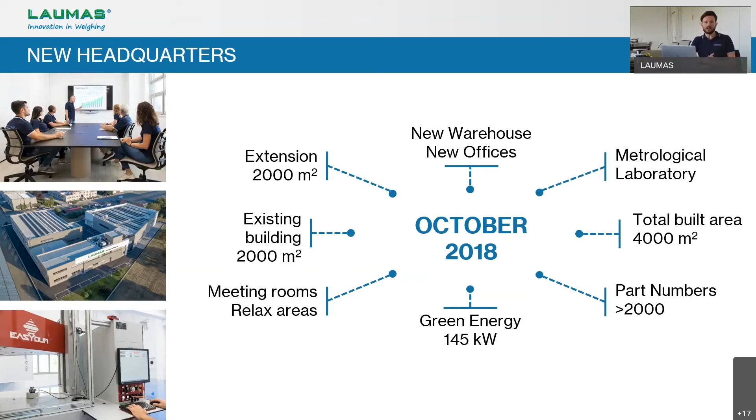Now the covered area is about 4,000 square meters, of which half for warehouse, which hosts more than 2,000 different codes of products, finished and semi-finished products, and also with the new photovoltaic installation that produces 145 kilowatts of green energy that is installed on the top of the roof.

Talking about the metrological laboratory, LAUMAS will be soon able to offer a calibration service for load cells and issue a certificate according to UNI EN 17025, as standards ISO 376 and ASTM E74, or to issue a calibration report ISO 9001. Our metrological laboratory is also completing the accreditation process by Accredia.

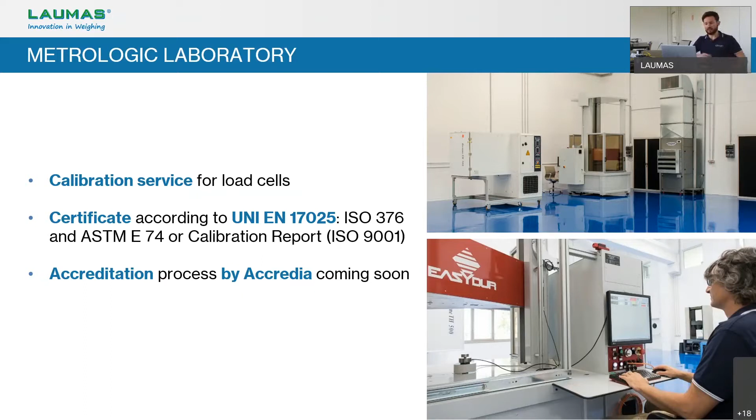One of our distinctive strong points has always been being able to dispatch orders of standard products in a very short time. We say maximum 5 working days, and face also possible peaks in sales of specific codes. And this is thanks to the volume of our warehouse, which is above 4 million euros and includes more than 600,000 units, always ready at stock.

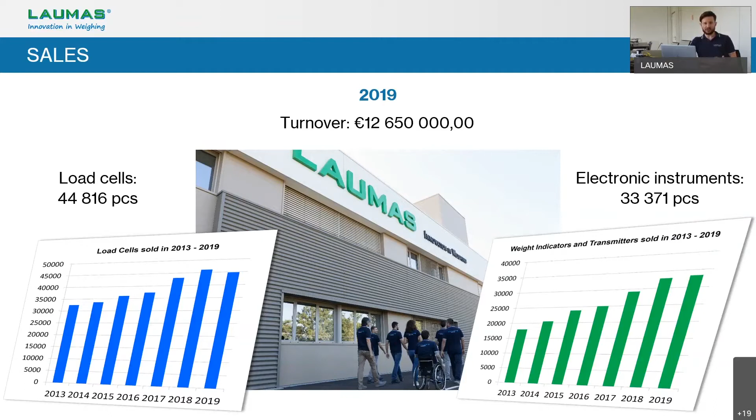And so, as we mentioned the sales, in order to provide some data about sales, this slide shows you how sales of load cells and electronic instruments, that are the 2 main families of our products, increased since 2013. During these last 7 years, load cells production increased about 40% and electronics production almost doubled. This means that in 2019, last year, LAUMAS sold almost 45,000 load cells and about 34,000 units of electronics, considering transmitters and indicators.

The other main difference between our past and our present is that even if during the first 20 years of activity LAUMAS mainly addressed domestic sales, now LAUMAS has been focusing more and more on international trading. So as the result, the export process is in constant expansion worldwide, and sales to foreign markets are growing steadily. As you can see from these numbers, exports have increased from 18% to 36% from 2011 to last year, and they are still increasing this year also.

Moreover, also sales within the Italian market are in continuous growth. So nowadays the average domestic sales are about 64%, but we need also to be careful because this data contains many instruments that are sold in a second moment abroad. So not all the units that we sell in Italy remain in Italy. A lot of them go abroad in a second moment, and so the total amount of real exports is actually much higher than what we can see in this slide.

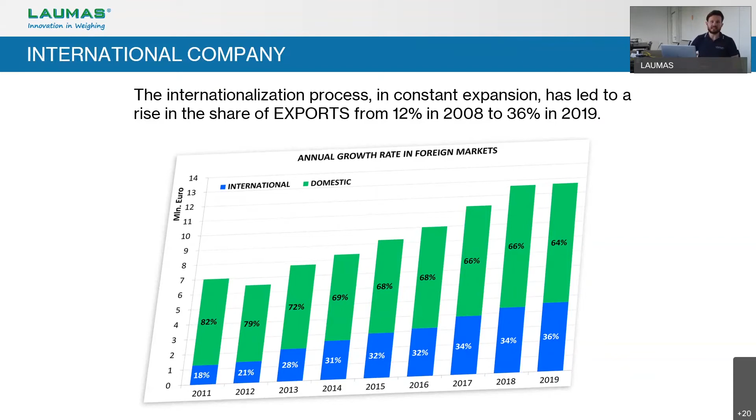So we believe that this steady growth has been made possible thanks to some strong points, some points that we believe to be our strengths. Firstly, the constant research and development based on continuous updating and innovation of our already existing products and new products.

An excellent quality-price ratio, thanks to 100% of units being tested before shipment and calibration service also available. But also, naturally, pre- and post-sales support and technical assistance and repair service that we supply to our customers. And finally, a wide range of items, as we have already mentioned, ready in stock to be shipped.

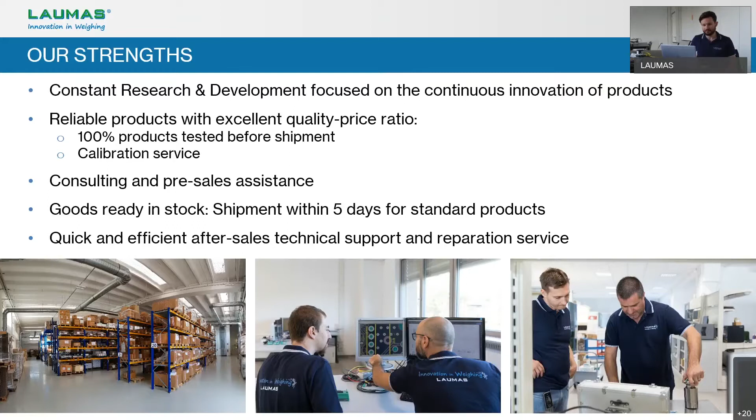To better represent the company brand, the slogan "Innovation in Weighing," which you may have seen by visiting us or at the occasional exhibitions or watching our videos, was created to emphasize the product innovation aspect by LAUMAS.

As previously mentioned, in 2007, our R&D department became fully operative and equipped with a laboratory allowing us to test electronic and mechanical components to ensure innovation and quality of the products. These tests include electromagnetic compatibility, electrical safety, immunity tests, emission tests. And they are all very important for us. All of these tests can ensure our products are not subject to external interferences or do not generate interferences on their own, but also ensure the safety of the workers using our equipment.

The other important laboratory that we also mentioned already is the metrological one. What we haven't said is that we have testing machines allowing us to test up to 10 tons with a climatic chamber and up to 50 tons in other cases. In case of tests for higher capacities, we rely on external laboratories.

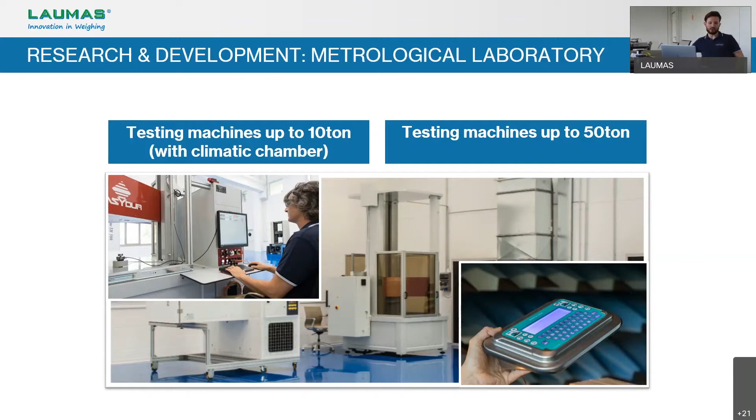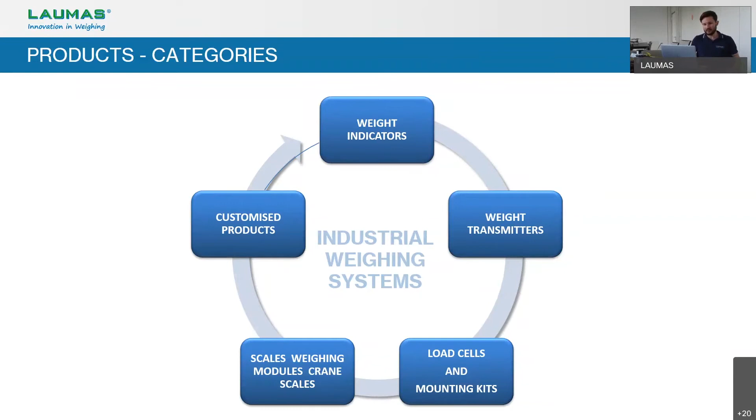We can therefore offer a complete service to our customers, which reflects into several categories of products, such as weight indicators, weight transmitters, load cells and mounting kits, scales, weighing modules, crane scales, and obviously customized products that are also very important. Now, let's see these categories one by one. As I said at the beginning, it will be a quick view of each category.

So let's start with the indicators. Our indicators are grouped in a series called W, and they are suitable for any industrial process that requires simple or complex weighing systems such as weight monitoring, dosing systems, batching systems, single or multi-component, filling, unloading systems, and so on. So you can see some examples of installations where our indicators can be used, and also the different mounting solutions and other characteristics.

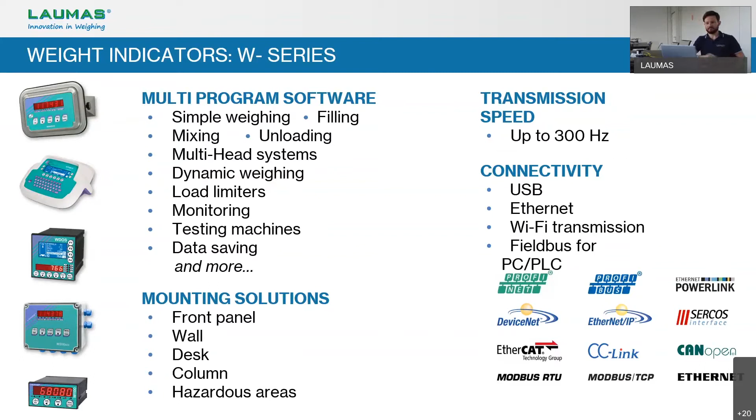Among the different models, the W100 and the WLIGHT are the easiest and simplest ones, which can be mounted in front panel or in other ways, especially the WLIGHT, and have different outputs and also serial ports.

They can be provided with different certifications and approvals, such as OIML for the European market, UL recognized components for the US and Canada, EAC certification of conformity for the Eurasian Customs Union, NTEP for commercial weighing and measuring in the US, PAC for legal for trade instruments within Russia, and NMI trade approved for Australia and New Zealand. These last two approvals, the PAC and NMI in this case, are available only for the W100.

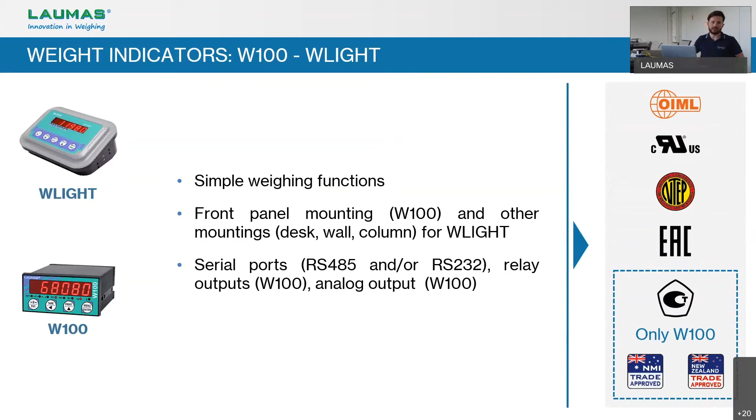The several models and versions of LAUMAS W indicators can easily adapt to an application, environment or needs, as we have seen. Specific versions with LCD or LED displays, basic or graphic displays, weighbridge versions, batching programs, plastic or stainless steel enclosures, several mounting ways, and a wide range of fieldbuses are available. We think that all of these features make our indicators extremely competitive and interesting.

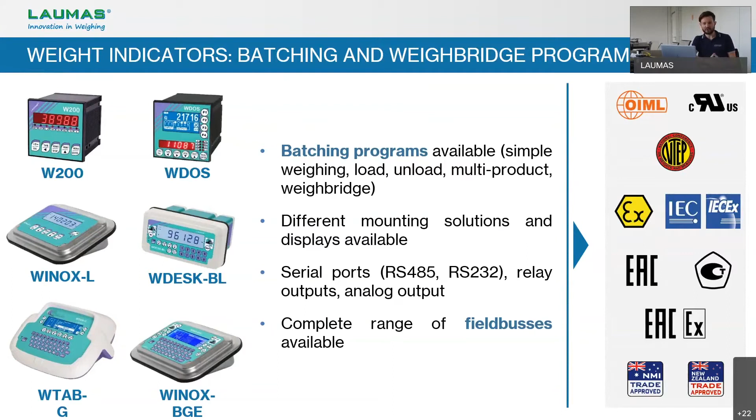As with the W100 and WLIGHT, the other members of the W family can also be provided with different certifications and approvals. Again, OIML, UL, NTEP, NMI, EAC, PAC, and they can also come, depending on the version, with ATEX, IECEx, and EAC Ex certifications, which are the worldwide certifications for installation in hazardous areas.

Let's now talk about the second category of products, which are the weight transmitters, whose function is to connect and transfer the signal from a load cell to the electronic instrument, which can be a PC, a PLC or an indicator. All of our transmitters have a display for reading, a keypad for easy calibration, and most of them can come with almost all field buses existing on the market to communicate with PCs and mostly with PLCs.

Our transmitters can be single channel or multi-channel. The second group refers to several additional functions that I'm going to describe later. Last but not least, the LCB is not properly a transmitter, but a signal digitizer, and we will also analyze it later.

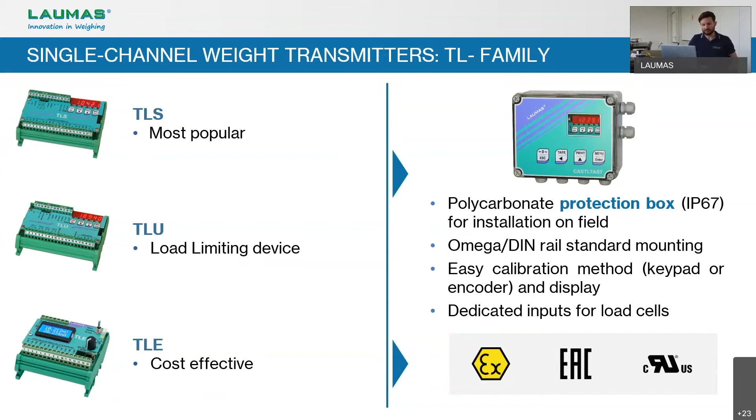As we previously said, the LCB can be assimilated to transmitters despite being actually a digitizer. It has its own specific features that make it different from the proper transmitters. For example, the availability of several field buses, more than the other transmitters, including, for example, IO-Link, and the possibility to install it integral to the load cell's body, directly connected to the body of the load cell, making it ideal for IoT and Industry 4.0 applications.

Also, it has a stainless steel AISI 316 enclosure that guarantees an IP67 protection degree and makes it possible to install the LCB anywhere the load cell is installed, where the load cell is working. The LCB is clearly conceived to work with a single load cell, but it's not limited to that. The status-LED communication interface also allows you to immediately obtain info about the state of communication.

And very important, LCB comes with its own software, the LCB Manager, allowing remote configuration, managing data backup and restore, and obviously firmware updating. On our YouTube channel, it's possible to watch a dedicated video explaining in detail LCB's features and also a technical tutorial about how to wire the LCB to a load cell. This is one of our products that makes our range and our offer so different from our competitors', and also the only instrument in the LAUMAS family available today with IO-Link protocol.

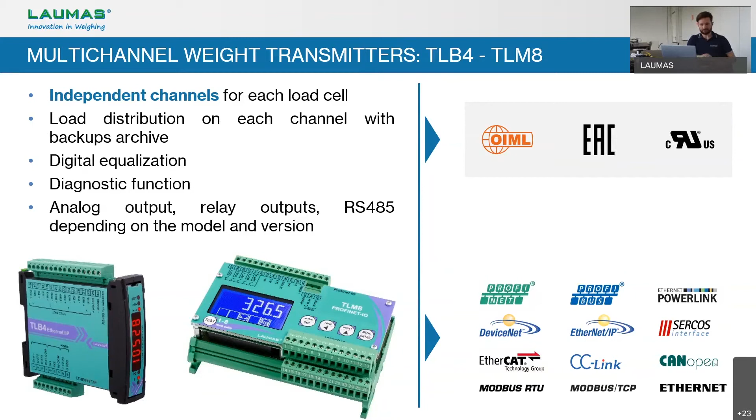Also, you can carry out digital equalization, making equalization much easier and faster than the traditional one. The main difference between TLB4 and TLM8 is that TLB4, as the name says, can work with maximum 4 channels. It's conceived to be installed on rail mounting or panel mounting, and is NMI trade approved, while TLM8 can work with maximum 8 channels, and it's ideal for rail mounting also, but it can also come with an IP67 protection box, making it suitable for installation on field.

The third member of the multi-channel transmitters is the CLM8, which is also called Intelligent Junction Box. It is approved for OIML, EAC, UL, and it will transfer the multi-channel functions that we have already seen to an indicator of the W series, except for the graphic ones. It manages up to 8 channels, and has only Ethernet TCP/IP as optional field bus, as typically it's connected to an indicator or a PC more than to a PLC, and you can order it with several types of protection boxes or also as a naked board.

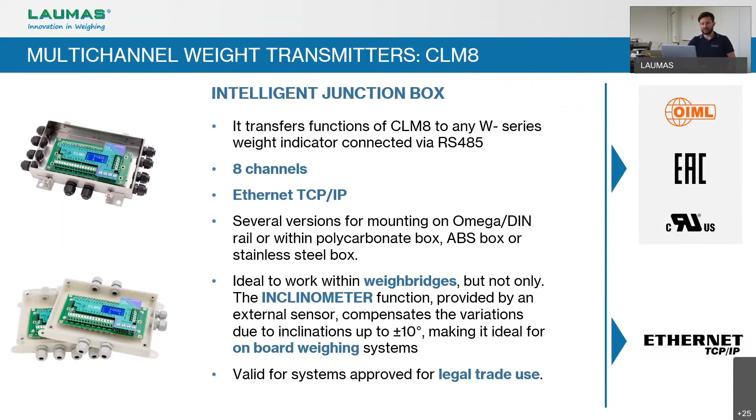Its main application is weighbridges, but not limited to. For example, the optional inclinometer function provided by an external sensor makes it ideal also for onboard weighing. This application is also valid for legal-for-trade systems and corrects possible variations of the signal due to inclination up to plus or minus 10 degrees. Notably, the inclinometer is now available also for the other multi-channel transmitters.

Finally, LAUMAS has a wide range of load cells that can satisfy any kind of application in weighing and force measurement. Depending on the model and capacity, load cells can come with OIML class from C2 to C5, NTEP certification, PAC standard, and all the approvals for installation in hazardous zones, so ATEX, IECEx, EAC Ex.

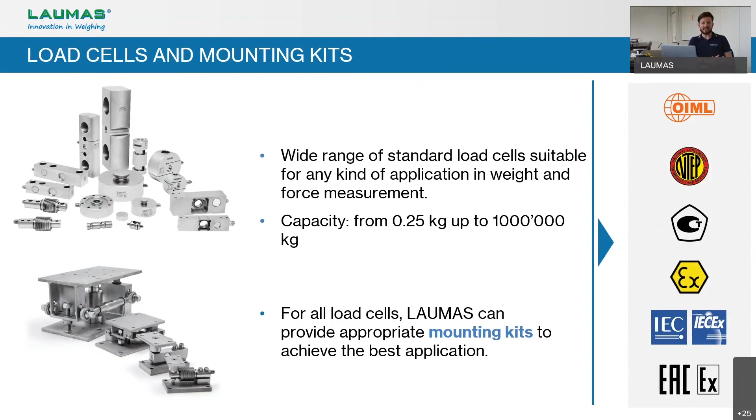The first group of load cells are the single point or off-center, whose capacity is usually low and conceived to work in single load cell systems. Each model and capacity can correctly work if the weight is applied within a platform area that is specified in its datasheet. It means that, for example, if you have a single point load cell that bears a plate that is indicated in the datasheet as 400 by 400 millimeters, we can use it for a platform having smaller or equal dimensions, but not larger.

Applications other than platforms are also roller conveyors, small tanks and hoppers, filling, bagging and packaging machines, and dynamic weighing.

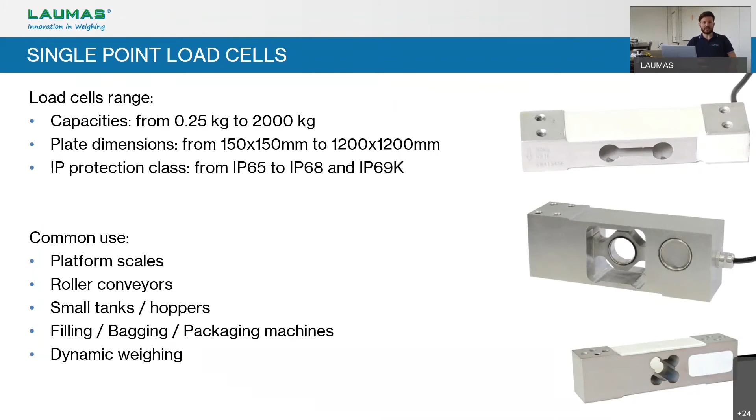The second group of load cells is made by the bending beam and shear beam ones. Their capacity range is low-medium, and they are used in groups of 3, 4 or more to weigh silos, hoppers, mixers, roller conveyors, big bag loaders or dischargers. They can be matched with 3 different kinds of mounting kits, which generally compensate plates misalignment and secure against tilt. Each one of these 3 groups has its own characteristics, as you can read in the slide or in the datasheet.

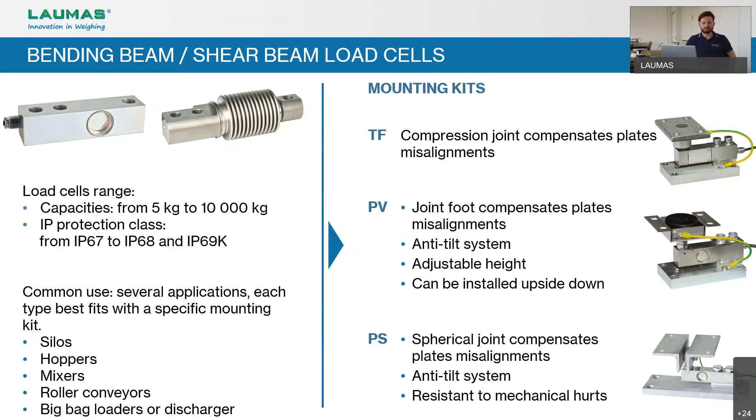Compression load cells make the third group, having capacity usually medium-high and ideal for tanks, hoppers, mixers, silos, roller conveyors, big bag loaders and dischargers. They can also come with 3 different types of mounting kits, of which 2 are very similar to the ones that we have already seen, and the V family is peculiar to this group of load cells, and it's very useful because it allows to be installed without the load cell, and so also to replace the load cell without lifting the entire structure. Also, this family is available with several bases in case you want to realize your own mounting kit.

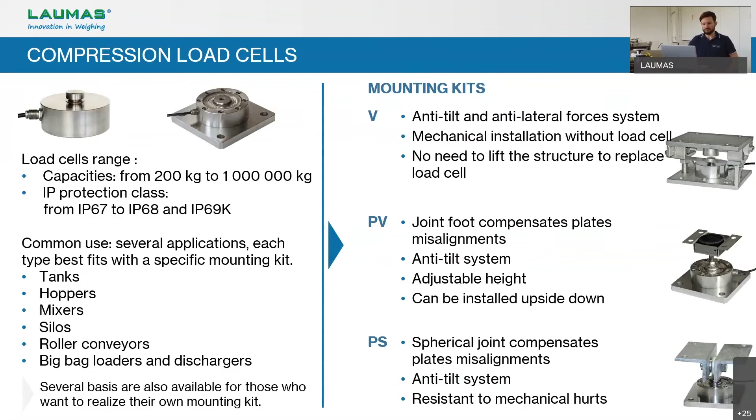Some load cells have other directions than compression, so we can in fact have load cells which can work in both compression and tension, others only in tension. Their capacity is medium-high and they are used in testing machines, force measurements and machine presses if we are talking about the 2 directions, tension and compression. If we talk about the tension ones, the most common uses are load limiting systems, crane scales, conveyor belts, hoppers, mixers, big bag loaders and dischargers, testing machines, and also, very important, to revamp old mechanical scales.

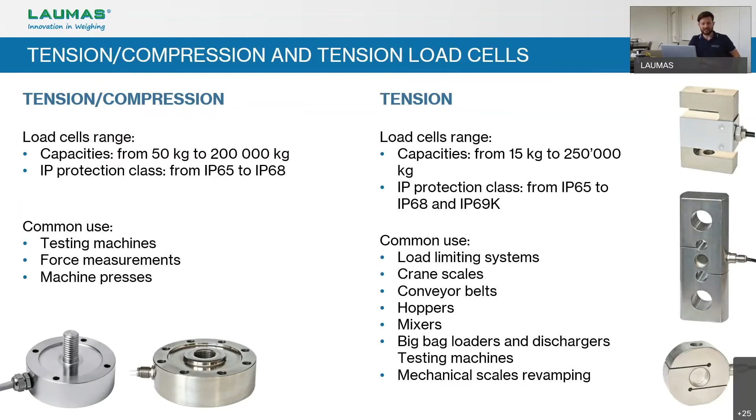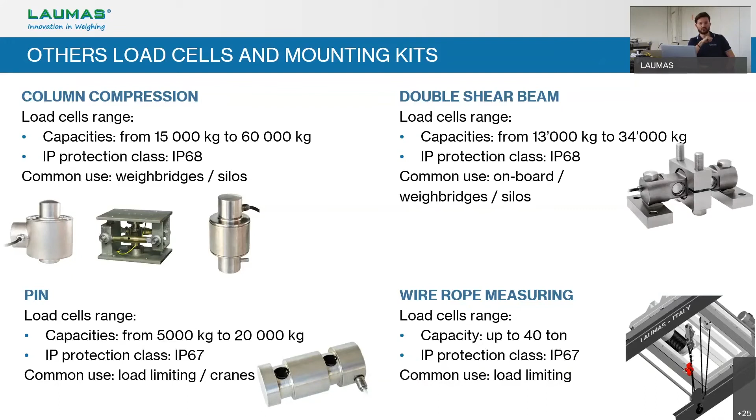Still talking about compression load cells, there is a small subfamily called column compression, whose common use is in weighbridges and medium-sized silos. We also have double shear beam load cells, which are used in the same applications, but also in onboard weighing. Then pin load cells used in load limiting systems and cranes, and wire rope measuring, naturally for load limiting systems.

Thanks to the fact that most of our production is in Italy, we can customize already existing models and design new load cells depending on specific application and customers' requirements. This is a very niche market, and we are very proud of it because we are one of the few companies in the world that are able to provide such service to their partners, even for small quantities, sometimes even for 1 unit if possible. In the slide you can read all the different data that can be customized about a load cell. So in practice, all kinds of data that make a load cell specific.

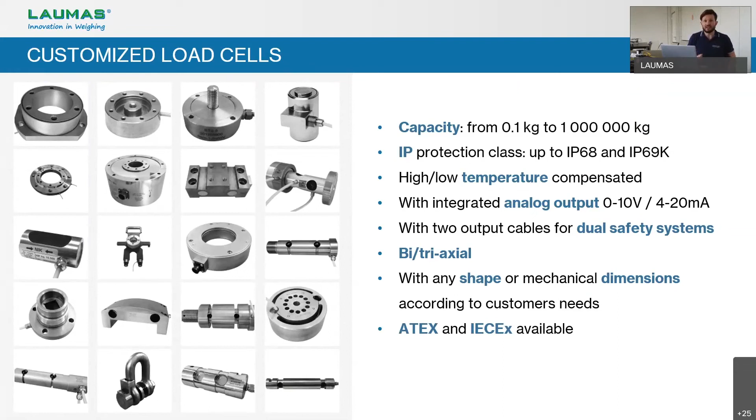The range of products and services offered by LAUMAS is not limited to electronics and load cells, but also includes many other finished products, such as weighing and approved platforms, industrial scales, pallet weighing, weighing bars, counting scales, retail scales, mini scales, pocket mini scales, crane scales, and pallet truck scales.

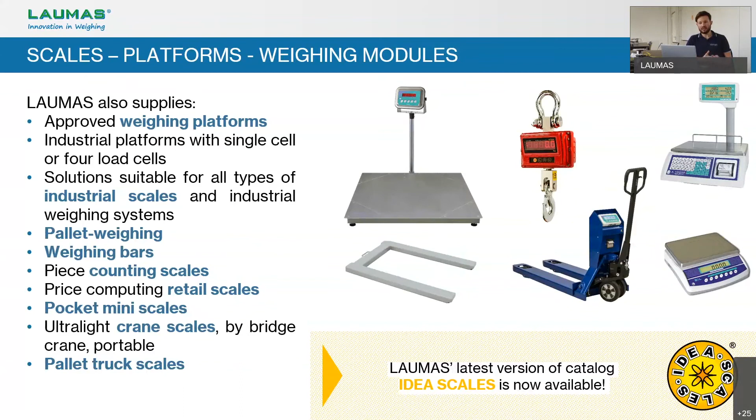Moreover, over the years, LAUMAS has obtained several systems and product certifications that are in constant evolution and increase. We have already seen some of them, or almost all of them, but let's recap. We can say that our products are now approved in accordance with the parameters laid down by the most prominent national and international bodies. We are an ISO 9001 and 14001 certified company.

We received the EC type approval for NAWI and MID, and also, as already mentioned, UL recognized component certification and NMI for Australia and New Zealand. Finally, our products can come with approvals for IECEx, ATEX, EAC Ex for installation in potentially explosive areas, EAC, PAC, NTP, OIML R76, R60, R61 and R51.

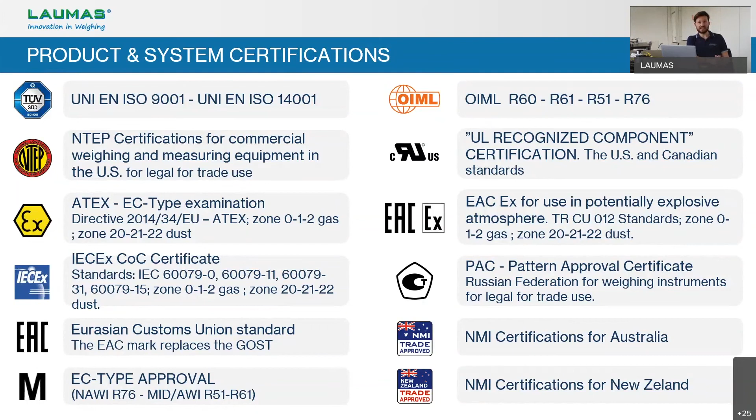The active and dynamic presence of LAUMAS in the industrial weighing market is constituted by partnerships with local and international organizations and consortia. For example, international protocols, associations and groups, as you can see in this slide. And another example, the National Conference on Weights and Measures for the US.

LAUMAS manufactures high-tech weighing components, which can find application in all main industrial sectors, from automation to construction, from livestock to chemical and pharmaceutical, and so on. This makes it very easy nowadays, after so many years of activity, to find LAUMAS instruments installed worldwide.

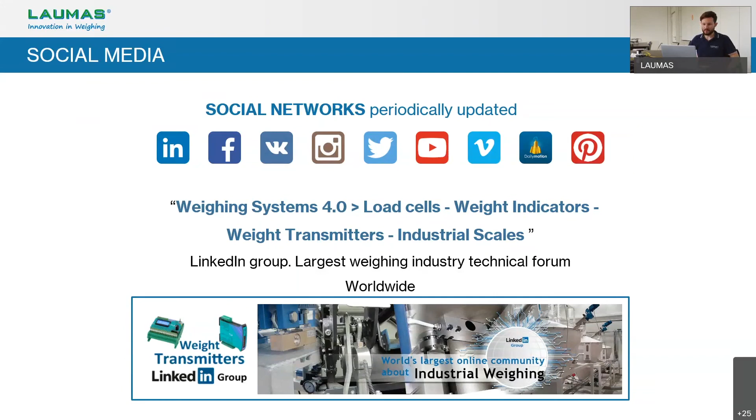LAUMAS also has a worldwide presence in over 100 countries through a network of dealers and partners specialized in providing assistance and installation in different sectors such as automation, integration, scales, and so on. In this way, we can cover the entire market, both geographically and technically speaking.

LAUMAS is also now directly present and operational in the United States and Canada, with a large stock supplied weekly of products ready for delivery in North America: load cells, mounting kits, weight indicators, weight transmitters. We can also offer USA-based technical support, both before and after sales. We believe that this will help us to provide the best service to an even larger audience of customers and potential customers.